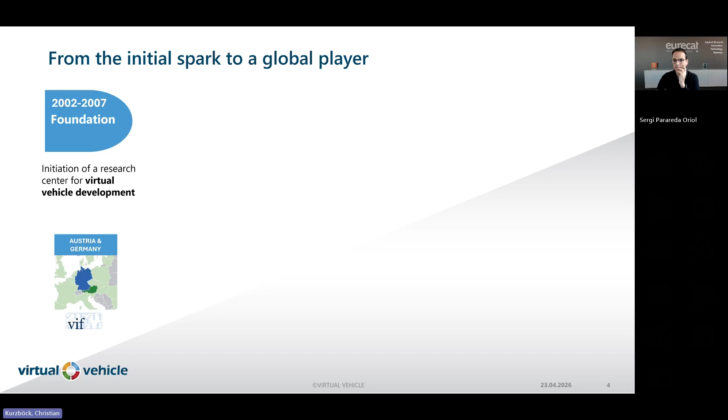We have started in 2002 with a small center in the Austrian and German region. We have grown in the European market, also on different Horizon projects, and contract research through our different K2 mobility funding possibilities.

And in the end, now actually we are, let's say, a global player on the research side, especially for virtual development, on different aspects and different fields of activities, which you can see here.

So we are working on, as I said before, mainly automotive and rail applications, but we are also working on energy, defense, some maritime, and also healthcare projects, where we are doing mainly the virtual development of different tools, methods, products, and so on.

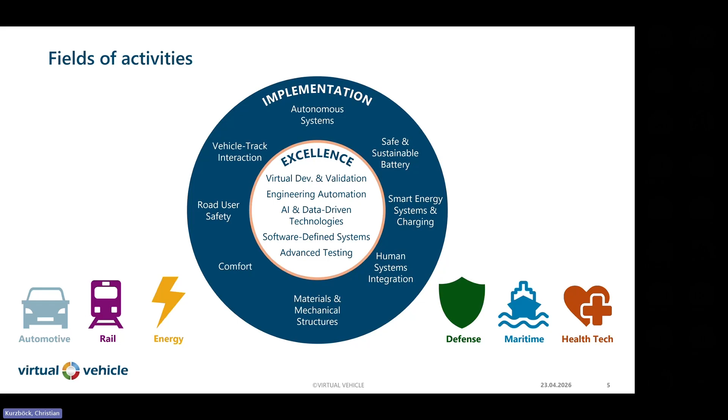And what we will have today, our main focus is the materials and mechanical structures implementation, and also the road user safety at virtual development and validation.

So what is the Virtual Vehicle Research Center funded for? We are a little bit a bridge between the scientific work at the universities and the industrial applications, where this output has to be used. We have our own funding scheme, that's the Comet K2 program.

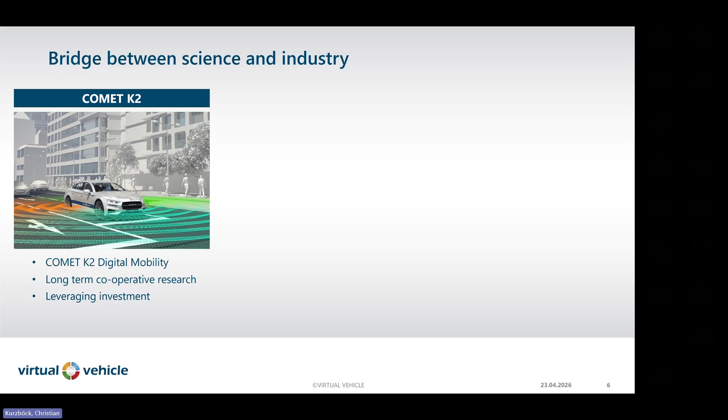We are working on different closed and also ongoing funded projects on Horizon level. And we have also some contract works with different OEMs and tier ones in our partner network, so we can provide there also different services for our partners and customers.

Our partner network, we have nearly every main OEM in the European market and the American market. We have a lot of different tier ones, scientific partners for our different research projects, and also in the rail specific and health specific sector, we have some partners where we are working on different projects.

The main point for today is a little bit material mechanical systems. That's a research field where I've been working on for 15 years, where we have different fields of activities like crash applications. We are actually working on different joining technologies and implementation in standard solvers for finite element simulations.

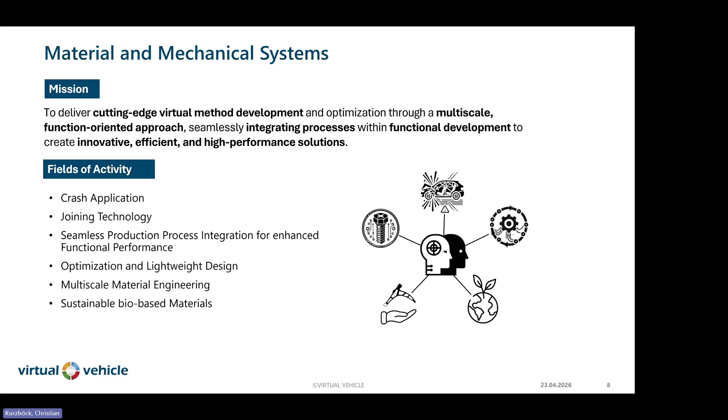Optimization and lightweight design is also a point which is main focus on the FlexCrash project. And since a few years, we are working on sustainable bio-based materials for sustainable applications in the automotive and mobility sector.

So that was a short introduction of the Virtual Vehicle and what you can expect from today's presentations. From the agenda, I will now hand over to my colleague Sergi from Eurecat, who will give you a short introduction of the FlexCrash project, and I will hand over after the presentation and give you a little bit more in-depth detail of the virtual testing of our adaptive and active solution.

Great, thank you, Christian, for the introduction. As mentioned, my name is Sergi Parareda. I'm the technical coordinator of the FlexCrash project, and also I'm a researcher at Eurecat, which is a research institute in Spain.

And I will give you just a short overview of the FlexCrash project. In this way, you will have an idea on what we are doing here. Just to have the main points, we'll see a little bit the project, the consortium, and then also the relevant points that we are working on in the project. That, of course, as you can imagine by the name of the project, we are always talking about a crash situation.

Here are some numbers about the project. It's a project of 48 months. We have a budget of about 4 million euros with 11 partners from 6 different countries. So the main point here is that we are covering all the value chain of the development of knowledge and also the application of this knowledge in real scenarios.

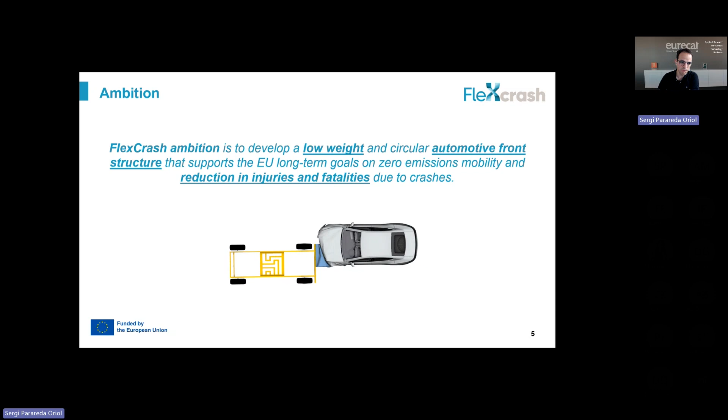But if we are reducing the weight of the vehicle, what we want is to improve or at least maintain the same safety of the occupant, the people inside the vehicle. So this is our main aim: to try to have a lighter and also a safer vehicle in the future.

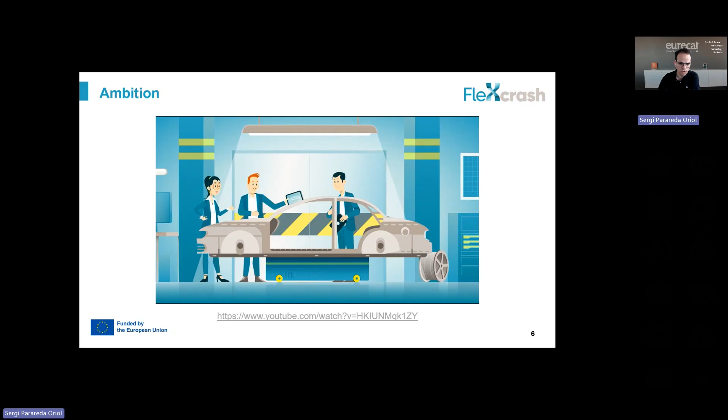So here I have just a short video, it's just one minute long, and I think it can give us good insight into the project. I hope it works properly. Let's say... maybe not, because I can't hear it. Well, if not, here you have the link. We will share this presentation with all of you afterwards, so you can click the link and see the video. Okay, so because now the audio is not working properly, we can just jump to the next one.

So then let's see the main motivation. As you can see, as we discussed, what we want is to design a lighter vehicle, but also a safer vehicle. In this case, we are focusing on the frontal part of the vehicle, since it's one of the most critical parts for safety.

And in this case, the new part, as you can see on the right-hand side, is that we are including a full aluminum design in order to reduce the weight of the vehicle, and then also to assess this full crash validation.

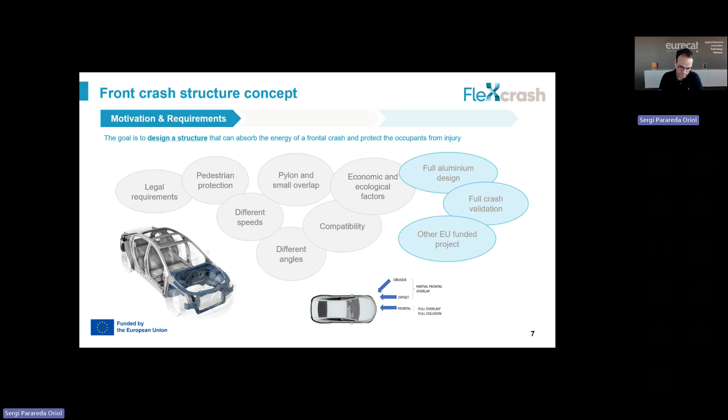That is all the information that you will see in the next presentation. But basically, what we want is just to design a proper frontal structure to absorb and dissipate all of this energy during the crash.

So to do that, what we have done, very briefly: we gathered all the information, following standards, Euro NCAP scenarios, and then gathered information about dash panel intrusion, the different decelerations that we have in the vehicle, in order to mitigate the damage to the occupants. And finally, of course, we need to know the kinematics and the chronology that we have during this impact situation.

To do that, we have used the GLab model by Gestamp, where we have a reference situation or reference structure made of steel, and then we are moving to a full aluminum frontal structure. Here you can see a little bit the path that we followed.

At the very beginning, we started with an HPDC aluminum part from a previous project, the Salema project, where they developed this component just to prove the technology. And we tried to implement it into our GLab model.

But since we have new partners in the consortium, we have the manufacturer Idria. We developed a totally new HPDC part and also new extruded profiles with new alloys in order to have better performance of these components. And on the right-hand side, you can see something in the middle of this HPDC part - we will see later, but it's more related to the active safety of the vehicle.

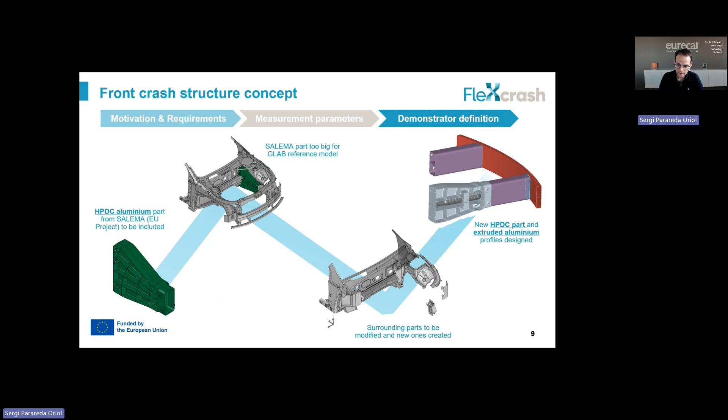And then here, all the processes that we followed. We started, of course, by knowing the situations we have, the different load scenarios in our vehicle, but also, in order to develop proper materials and proper solutions, we developed new testing procedures about fracture toughness mostly, in order to see which is the best aluminum alloy for these profiles.

These are the main components for dissipating energy. Then, of course, the HPDC optimization - although it's not a component or material really suitable for these situations, we wanted to prove that we can design it for crash situations. And here you can also see the AVFFs, so basically we are using hybrid manufacturing.

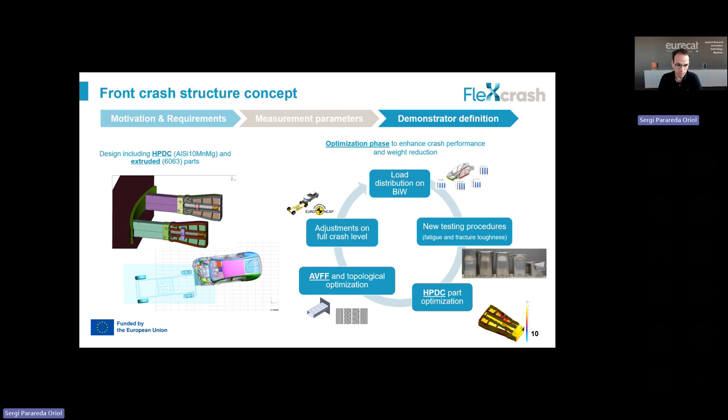This is another relevant point of our project: we want to use additive manufacturing to reinforce locally the extruded profiles or the different components that we are having in our vehicle, in order to have a proper crash performance while we are reducing the weight of the vehicle.

So basically, what we are doing in the extruded profiles is using this additive manufacturing, the LMD process, to have the deposition or these ribs on top of these extruded profiles in order to reinforce locally some parts, and then we can just use the unreinforced ones as crash triggers. By using these strategies, we can achieve a weight reduction of at least 12% in these components, while maintaining the same energy dissipation.

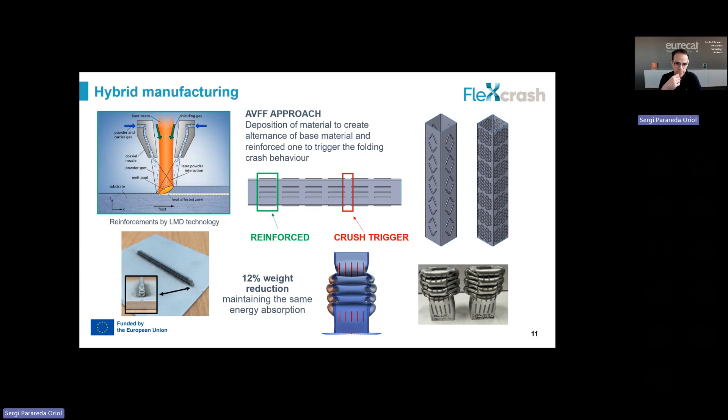Here you can see that we developed quite a lot of different patterns: fishbone, honeycomb patterns, and also a lot of different combinations with longer gaps, shorter gaps, more ribs, less ribs, etc. As you saw in the previous slide, we followed an optimization process, producing quite a lot of different ribs and structures in order to set up the process and see that everything is working properly.

This is when we are talking about AVFF in the project, which you will probably hear a little bit about. We are talking about this adding value to function of features. So at the end, these ribs that we are introducing in our components by using the laser metal deposition.

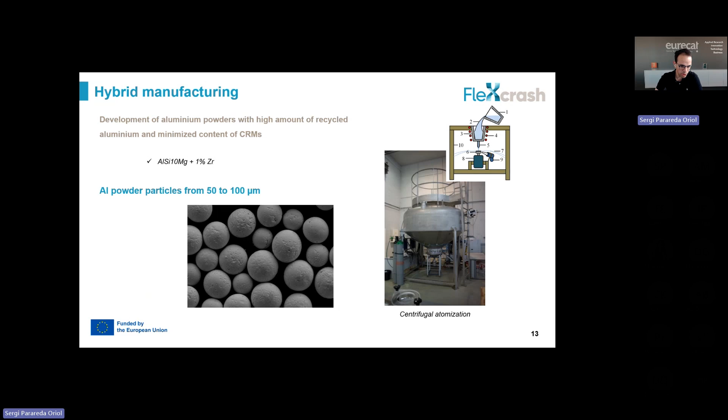To do that, we also developed new aluminum alloys, using zirconium for instance, new powders for this additive manufacturing process, in order to improve the performance of these ribs. This is also a relevant point in our project.

And here, finally, we have the demonstration of the results. So we are manufacturing the demonstrators of our project. The idea is to see what happens when we also have non-standard crash situations, when we are changing the speeds, the angles. You will hear more in the next presentations.

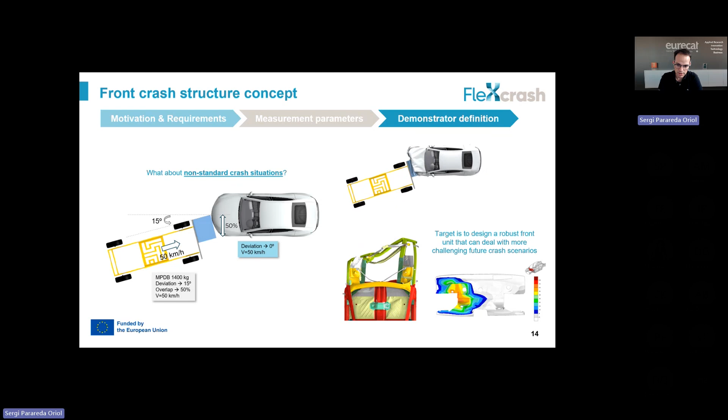So just to conclude, some takeaways that I wanted you to have in mind for the project. Basically, what we are doing is developing new structures for crash situations, in order to reduce the weight of the vehicle, but maintaining the same crash performance. Then, by using aluminum alloys and also similar aluminum alloys, we want to improve the recyclability of the vehicle, and of course this also has an impact on the environment.

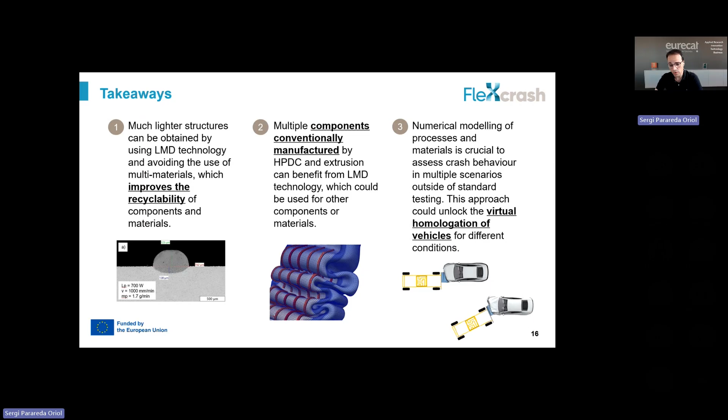And finally, the relevant part about simulation, and how we can predict the different crash situations, how we can adapt our structure in order to design the vehicle, but also how we can use these simulations for the virtual homologation of our vehicles that we will design in the future.

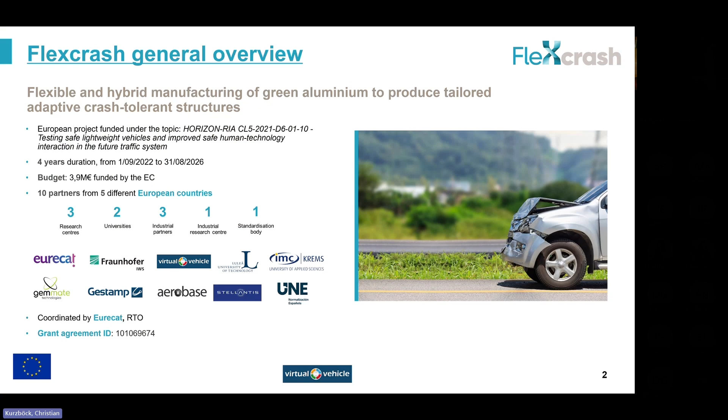First slide, FlexCrash general overview. I will skip the FlexCrash project introduction. So what's the research beyond the state of the art? As Sergi mentioned before, the main goal is to lightweight the vehicle as much as possible, because less weight means less fuel or energy consumption during operation, giving us a very efficient mobility solution.

On the other side, we want to increase passenger safety. The main problem is these two targets do not fit together - when you lightweight the vehicle, passenger safety typically decreases. So how can we tackle that problem? That is the main research question of the FlexCrash project.

How can we make the vehicle more lightweight on one hand, and on the other hand increase passenger safety, by adapting classic solutions with adaptable manufacturing technologies and an active system that helps the passive structure increase passenger safety across different crash loading scenarios for future mixed traffic possibilities.

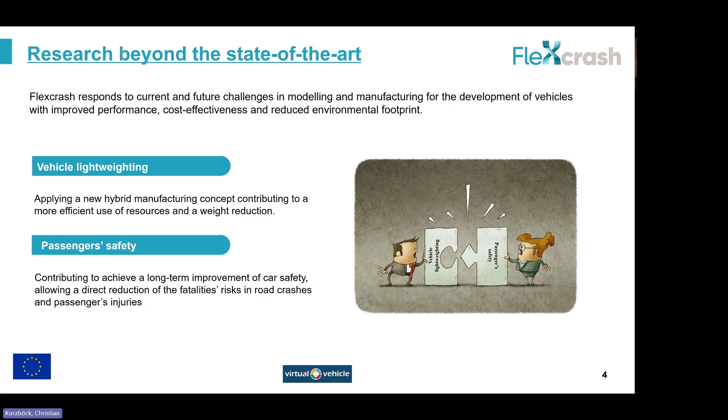There are 5 different pillars where our solution is working. As Virtual Vehicle, with partners from the Technical University of Luleå, Aerobase and also Gestamp, we are working on crash simulation, from advanced material simulation up to virtual testing in the full vehicle.

That's one pillar. The second pillar is the manufacturing side, which has to be flexible and hybrid, combining different manufacturing technologies to assure our solution is manufacturable and also provides the developed safety for the passenger.

The third pillar is the structure itself. We have to optimize our patterns, our structures, and active system for the different loading scenarios that we worked on at the beginning of the project.

Then advanced testing, from the material itself up to component level and sub-component or sub full-vehicle level, will be carried out at the end of the project in the next half to one year, just to validate our virtual work and testing that we are actually working on.

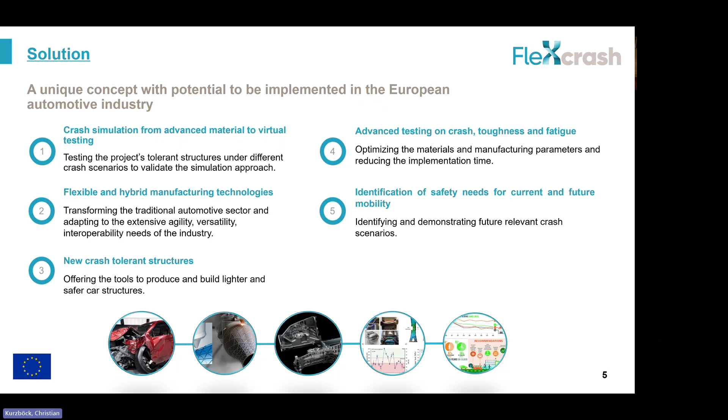So what are the future relevant crash scenarios we found and set up our work on? We have this crash reconstruction pipeline from IMC Krems, one of our project partners, where we can simulate different scenarios, generate different ADAS opportunities, simulate driver behavior, and from this driving agent behavior jump to our passive safety simulation and development.

We have the opportunity to change different scenarios. We can use this pipeline for scenario creation for future mixed traffic, and we can use this data for our optimization on different angles, velocities, and so on.

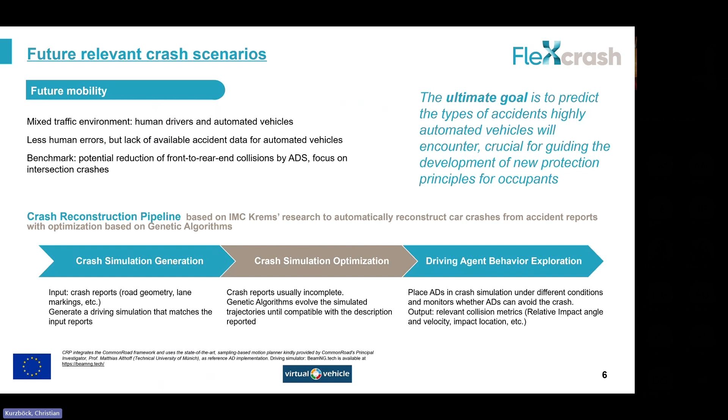From our research and our scenario generator, we found 3 different crash scenarios which will be the main scenarios within future mixed traffic. From these 3 scenarios, we have these configurations for testing our system.

So we have these 3 different front crash scenarios, and we chose for the main validation and virtual testing the bottom right one, because that's the most severe one for passenger safety.

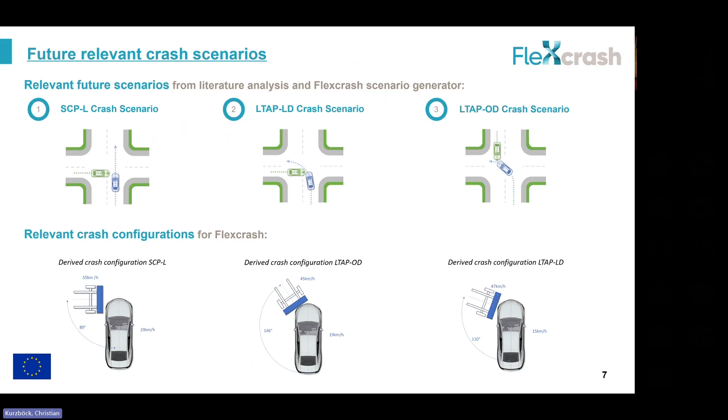From these crash scenarios, as Sergio mentioned before, we are able to use the Gestamp GLab virtual model as a demonstrator, where we started with the standard steel front end. We modified this front end system with a full aluminium crash structure, as you can see in the top right picture, and I have an older version from the Salema or HPDC part.

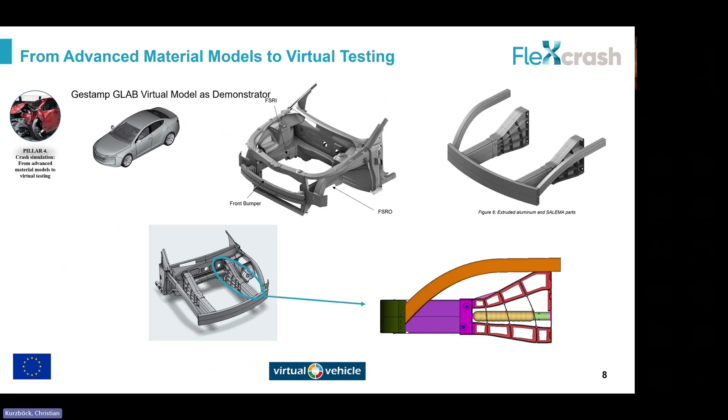That's a combination of an aluminium extruded part in the front rail, which will be modified with different additive manufacturing and welding patterns. In the rear end, the HPDC part is highly modified in the last version by Hydria and our optimization, and there we've integrated the active solution mentioned before for adaptability of the full front end crash behavior.

What was necessary for that? As Sergio also mentioned before, it was material development, so that we can use these different recycled aluminium alloys for these welding processes, to adapt a quite simple base structure.

The goal was to have an extruded, simple designed front rail, which will be strengthened with different patterns and modified for different loading scenarios, weight of the vehicle, and so on, so that we can adapt these simple extruded profiles with whatever pattern or structure we need to adapt the crash performance of the front rail system.

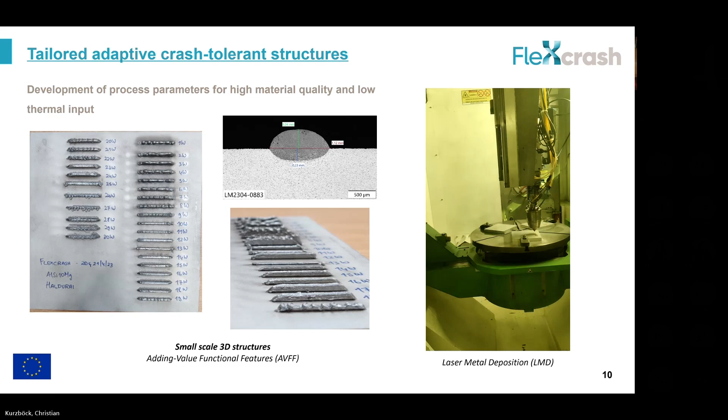So in the end, when we go to virtual development and virtual testing, we have in the upper left animation the standard front rail without any patterns on it, and in the bottom left animation the simplified patterns on the structure. What you can see here is the energy consumption between these different solutions.

We are gaining about 30% energy consumption with the same baseline extruded profile, just by implementing these different welding patterns to adapt the crash performance of the front rail. So that's one of the technical solutions for the adaptability of quite simply produced parts, with different pattern optimization directly on the extruded profile.

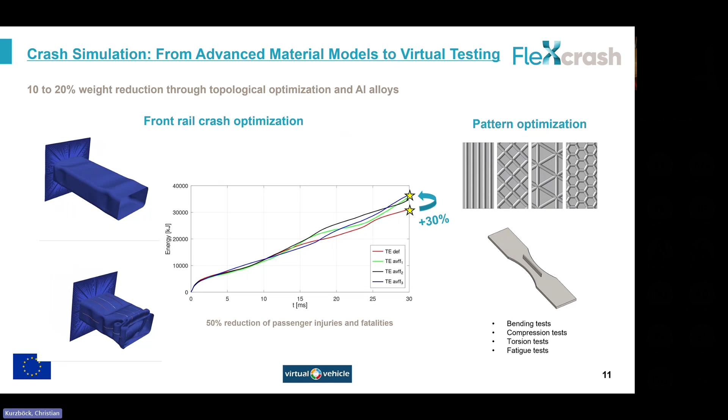Just to give you an impression of how this could work: we compress the front rail, and when it is fully compressed, the active system starts to work and modify the front end crash behavior dependent on different loading scenarios, and also on different crash partners, velocity and weight—for example, information that can come from vehicle-to-vehicle communication. We can adapt the active system directly and increase the compatibility between different crash partners.

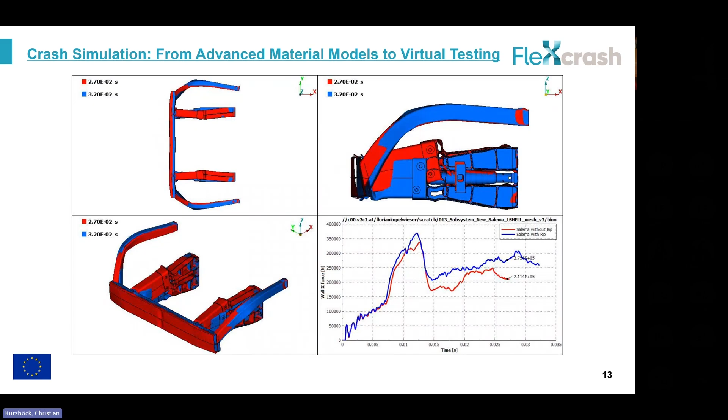So virtual testing and virtual prediction of the behavior of different structures will get more and more important. For that, you need really well validated material cards and methods to predict behavior, to enhance, in the end, vehicle safety, because of the two different targets that we have.

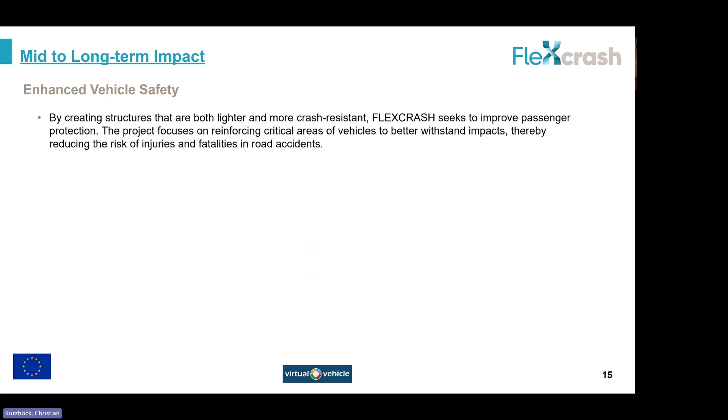On one hand, lighter vehicles, and on the other hand, higher passenger safety. The pipeline from FlexCrash is a combination of a passive structure and an active system that we are implementing in the front end crash structure, to in the end have an optimal deceleration pulse for the passengers in different vehicles.

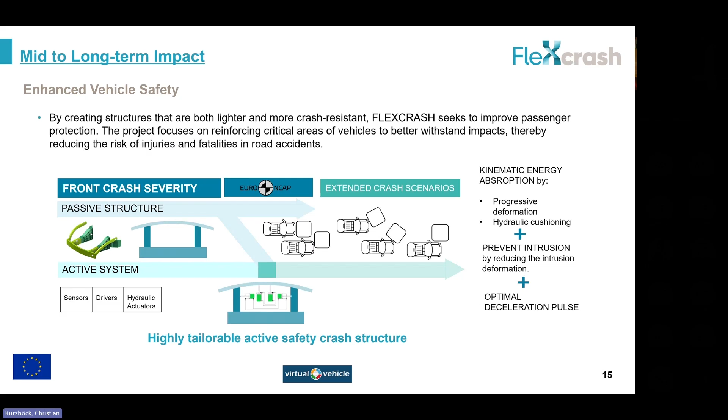Not directly virtual development, but manufacturing technologies also have to be mentioned here, because that's the crucial point—these manufacturing technologies go hand in hand with virtual development, since we need to know if the different technologies are working and fit together. That's also a main point of the FlexCrash project: to ensure these technologies are working, especially for crash applications.

And in the end, when it comes to recycled aluminium, environmental sustainability is also a big point for EU goals of reducing greenhouse gas emissions up to 2030.

So that was a quick overview of the virtual testing, virtual validation part of the FlexCrash project. If there are any questions, please, we have a Q&A session at the end of the webinar. And thank you very much for your time.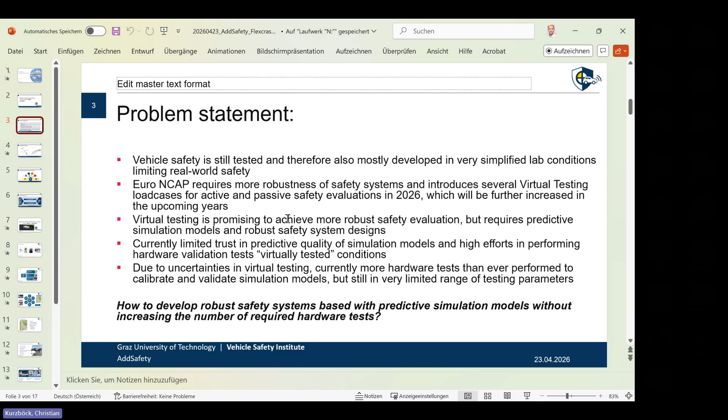But for this situation, we need really predictive simulation methods and robust safety system design. That's at the moment a little bit limited, because the trust in different simulation types and how you can qualify simulation models for Euro NCAP testing requires a lot of validation tests too. So the big question is how to develop robust safety systems based on predictive simulation methods without increasing the number of required hardware tests in a useful way.

So the current situation: we have limited real-world safety addressed in some test cases. At the moment, a lot of industry partners are trying to increase virtual testing in their houses, but they also have to increase hardware tests to do the validation part, and that increases the costs a lot, which is not very useful.

So the AddSafety ambition: it's a national funded project with about 6 million euros over a time period of 4 years. We are at the moment in the first project phase, and I will show you the partnership at the end. But what's the main part? It's to improve this kind of hybrid testing—to conduct the necessary hardware tests and component tests in parallel to see how we can make the simulations more beneficial, with better boundary conditions. That's one main task: to reduce development costs and also make it possible to have use cases in simulation which are too difficult or too dangerous for hardware testing.

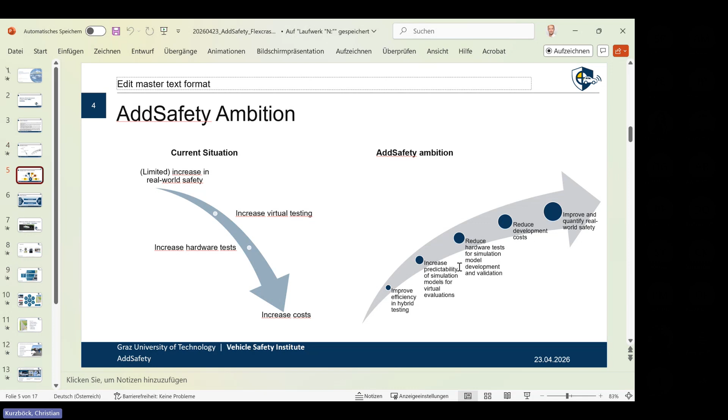The idea behind it is, of course, more robust vehicle safety systems, with benefits and test cases not only from the law or Euro NCAP, for example, but also from real-world benefits. So we need more robust evaluation scenarios, which will be defined in the project. We also need a way to qualify passive and active safety simulation models which are allowed.

For example, for the Euro NCAP HBM test cases, you have to qualify your simulation HBM. There are validation cases you have to simulate before, and once you have the qualification from Euro NCAP, you are allowed to use it in simulation. Therefore, we need new methods for selecting these test cases and simulations.

Therefore, the project is one big project with four work packages. We have methods for active safety simulation, model calibration, validation - that's the active part, where we are mainly involved.

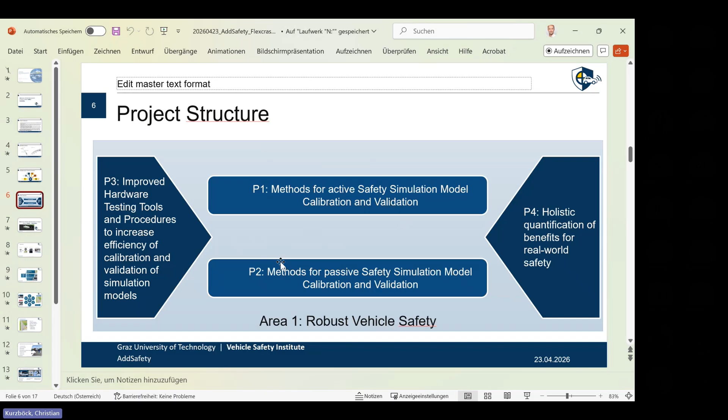What's our part in this project? We are more on the active side. Our motivation is, of course, we have all these topics about road user safety. We have the boundary conditions and requirements like Euro NCAP, NHTSA, also C-NCAP.

We have in our company an autonomous vehicle - our Ford Fusion. It was the first vehicle which was allowed on test tracks, and also some streets to drive autonomous, with a test driver.

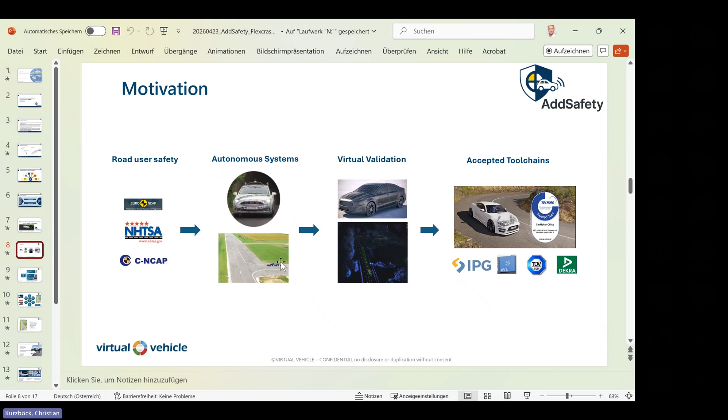And we are going to do the virtual validation and develop a digital twin for acceptance, for example with declarative methods, so that we have in the end a process which will allow the customer, or in this case the project's partner, to have a whole virtual test setup, for example in this case for Euro NCAP.

So what's the main part for this digital twin? At the moment, we are at the status that we already have our test vehicle and a simulation tool in the CarMaker, IPG CarMaker software. Now we are in the process of doing the validation and verification.

We are also a partner of Euro NCAP. Austria has been a partner in Euro NCAP since 2022. Virtual Vehicle is here partnered with Safety Labs Austria, and we are addressing the virtual active part. We are working in the working group for setting up all these methods and roadmaps for Euro NCAP together with the other Euro NCAP partners.

At the moment, we have our proving ground in Austria, where we already have a full digital map of this testing area. We are working together with our partners to verify and do the process for the validation of the targets for the tests.

And of course we have our vehicle test - this is our Ford Fusion, which is from the software side completely open for our company. So we have the possibility to read out the test data and also have the information on the measurement system, sensors, cameras, and all that we are at the moment going to implement in the software.

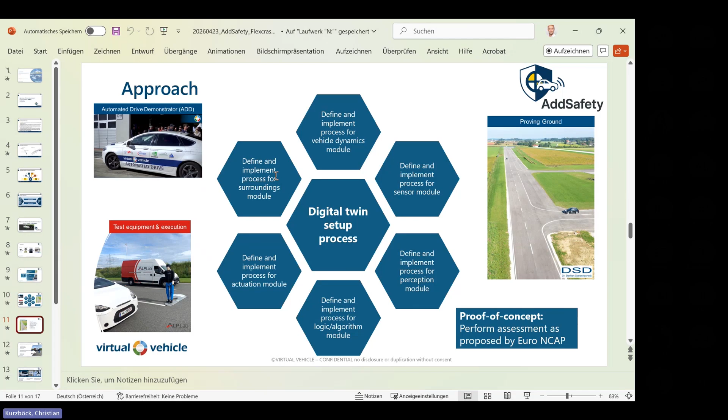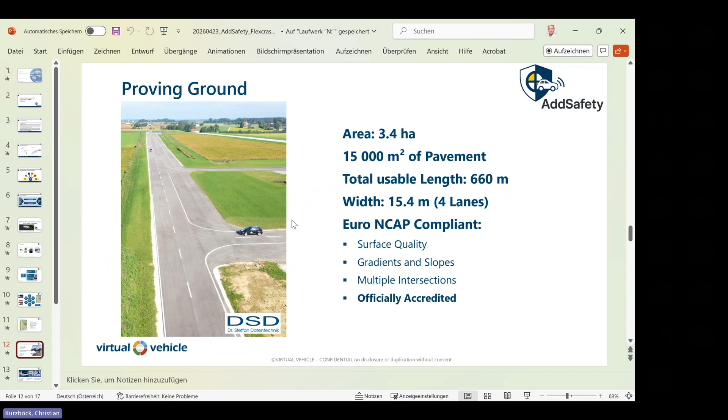So just some info about the proving ground. It's a Euro NCAP accepted proving ground, 2 hours away from Graz, where we work together. We also have here the whole information of surface and slopes, gradients - everything is available and also needed for the support systems and for testing the Euro NCAP requirements.

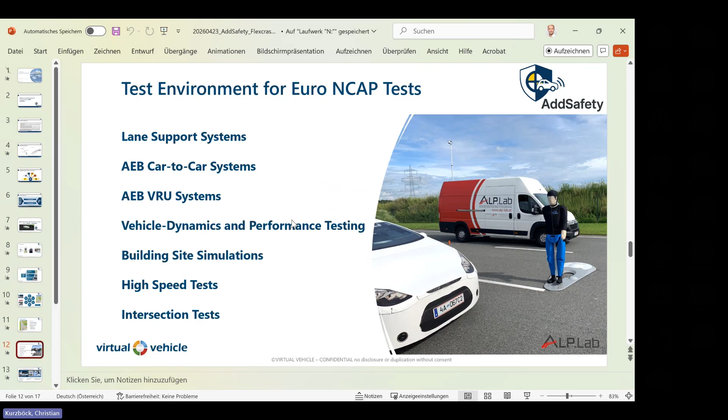We have partners like ALP.Lab, which support us with hardware equipment, and we are currently working on the validation for the software at the moment. And of course our vehicle, as mentioned, is a Ford Fusion, which is equipped with different sensor types, cameras, everything necessary.

We have had this demonstrator vehicle for 8-9 years, and have tried a lot of different measurement equipment and systems. All this know-how and these methods we've been learning over the last years are now implemented in this process. It's a lot of work to do, but we are on a good way for that topic.

If you are interested here for other projects, our vehicle is completely open for projects with different possibilities. Depending on the case, in this project we are using together IPG CarMaker.

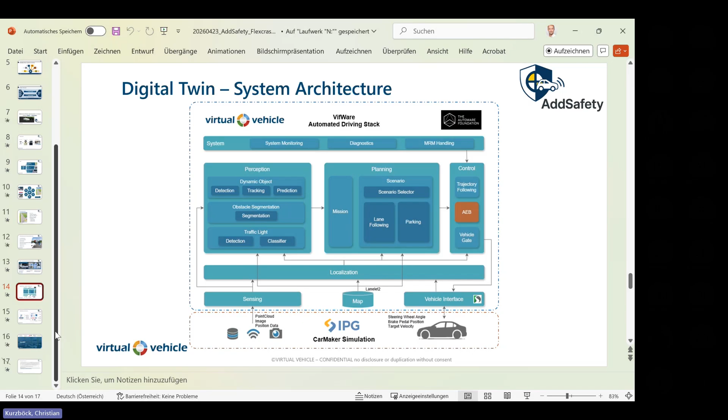So you are able to test different scenarios, measurement equipment, sensors, and it should be in the end a method which could be used for Euro NCAP and also for other industry partners. That's my last slide for this project, if you are interested.

As mentioned, the coordinator is Graz University of Technology. We at Virtual Vehicle are the scientific partners for the active part, and of course the testing partners. AlpLab is responsible for active safety testing. DSD is the company which owns the test track. Then we have also TECCON, who are accredited for Euro NCAP passive testing; they are also located in Graz.

From the industry partners, we are cooperating with 4a, Humanetics on the test equipment and software side, Andata, CarMaker, and AVL, to make this happen for both active and passive testing. Then we have component suppliers in the project for sensor systems and sensor types, and we also have involved two German OEMs to have the method implemented, as well as test vehicles and so on.

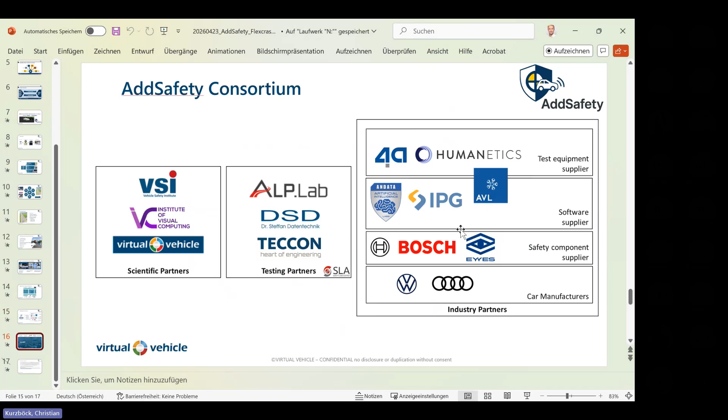Thank you for listening to this project overview, and sorry for the interruption, beginning with the software problem on the laptop. Yeah, thank you.

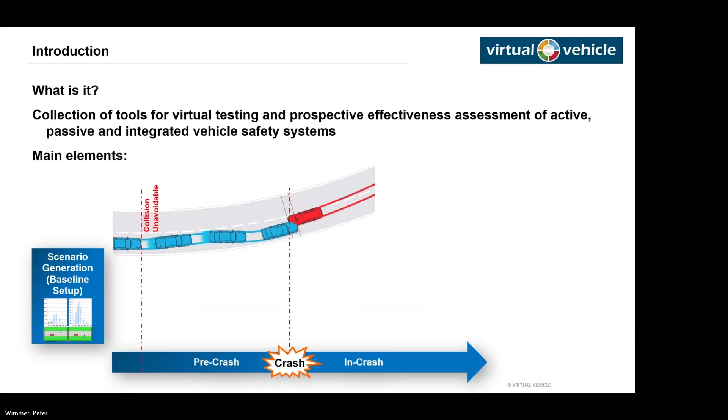The main elements are as follows. We start with scenario generation, so we need to define a baseline which represents the situation that we have before we introduce, even virtually, a certain safety system. Then we directly start with our simulations, which are divided into several parts.

The first one deals with the pre-crash phase, so there we have a scenario-based approach which consists of all relevant components like the vehicle, the driver, the safety system consisting of sensors, algorithm, actuators, and also the vehicle surroundings. If this simulation ends up in a crash - and this, for now, is just an example, the VRU setup - we have one or two stage in-crash simulation, which consists of various tools that allow us to determine the injury relevant for the final step.

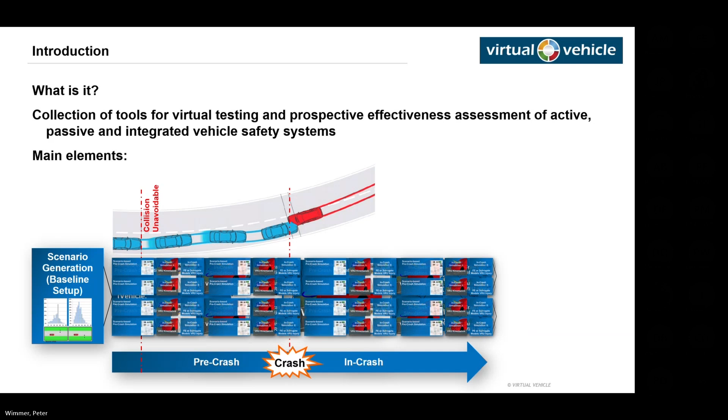Of course, we have to do this not only once, but as we want to determine effectiveness, we have to do this many, many times. This is also a challenge that I will address later on. And the final step is then effectiveness assessment - determining which kind of safety, or how large the safety benefit is, that we can obtain with a certain safety system or safety system configuration.

Regarding the baseline scenario generation, let me start with this very general slide. This image is taken from an ISO technical specification that I was also involved in developing. There we define several types of baseline approaches. Basically, we have three main approaches.

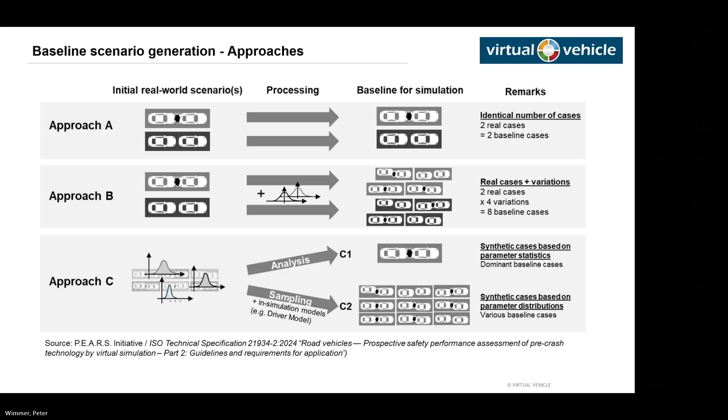The first one is just replicating real-world cases. This is what we call approach A. Approach B would then be extending these real-world cases with some distributions and modifying them, thus increasing the number of baseline cases. Approach C is a little bit different. It is not directly replicating or based on individual real-world cases, but it's based on distributions of relevant parameters taken from the real world, then generating synthetic cases based on these distributions.

I would like to show you one approach that can be attributed to this synthetic case generation. This is something that we have developed, what we call the scenario generator. It is based on crash data, as mentioned before. It is capable of generating an arbitrary number of cases which are statistically representative, also including rare combinations, and it is built to produce scenarios for car-to-car and car-to-VRU test cases.

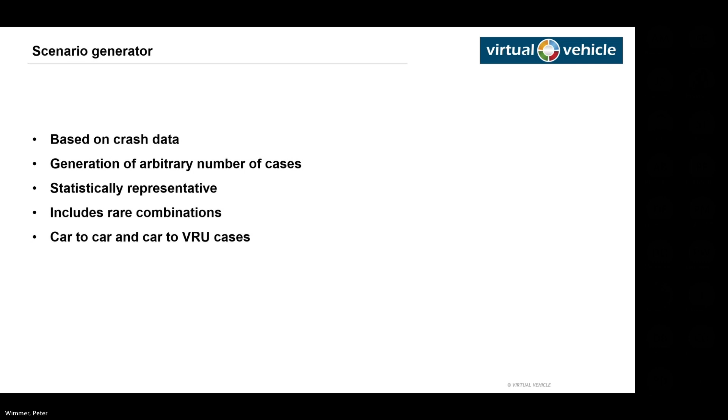This is a short overview. It has a GUI, obviously, where you can make some selections. What you will get as an output is information for a test case on the initial positions and speed profiles, basically the trajectories of the involved participants in the simulation, but also environment conditions like dry or wet, or lighting conditions like day or night, which might be relevant for sensors and also for human drivers. For the VRU cases, also some properties of the vulnerable road users, like sex, age, height, weight, with statistical data behind them.

Coming to the next main element, this is the continuous virtual simulation, and first of all the pre-crash part. Also here I would like to reference the ISO technical specification. There is depicted a generic simulation framework for prospective safety performance assessment of pre-crash technology, and we stick quite closely to that.

Maybe I'll go briefly through it. We have four main elements, I would say. We have simulation control, which is more or less the conductor of the simulation. Then we have the vehicle surrounding, which is everything that is relevant around our vehicle under test - this is traffic, everything that moves. Infrastructure is everything that is static, like roads and buildings. Environment is things that might change over time but do not move, like lighting conditions, weather, and so on.

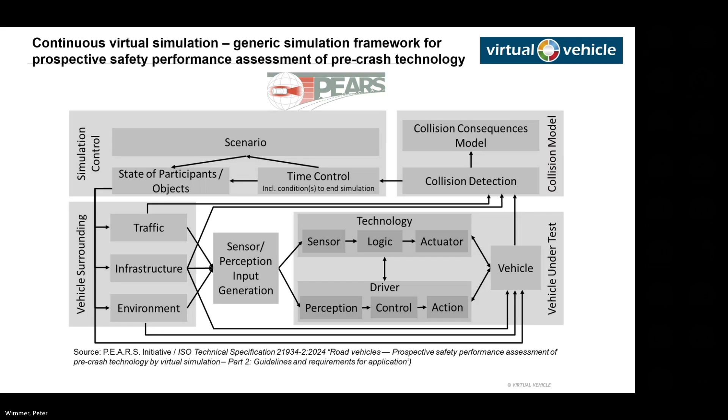And the final block is then the collision model, which of course consists of collision detection, so that we know if a collision occurs. And if a collision occurs, we have the collision consequences model, which seems rather small here, but this can also be a lot and very complex.

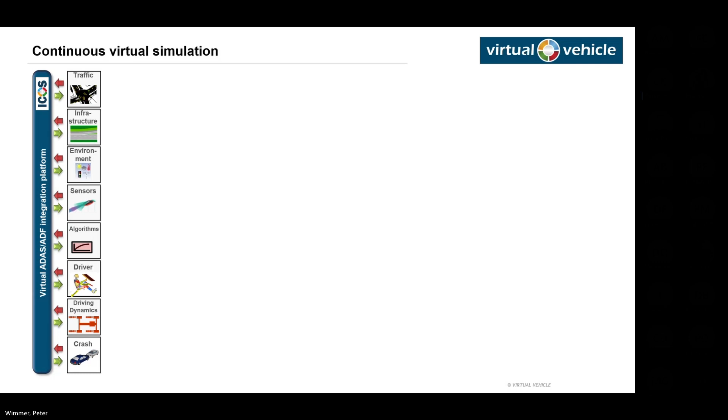Okay, let's see how we did this. You might recognize several components that you have seen in the previous slide. What we do here at Virtual Vehicle and in the safety toolchain is take all these components and connect them via our virtual ADAS/ADF integration platform, which is a co-simulation based approach. This approach allows us to connect all the elements and ensure that they communicate with each other with appropriate timing, and also that the scheduling is such that the models run when they are required.

We can stop and start them, because in the crash phase we don't need to start them in the pre-crash phase, and the other way around. This is one example of an exemplary setup for a VRU use case. You can see that we can couple a lot of different simulation tools together to build an overall simulation that covers all the relevant aspects.

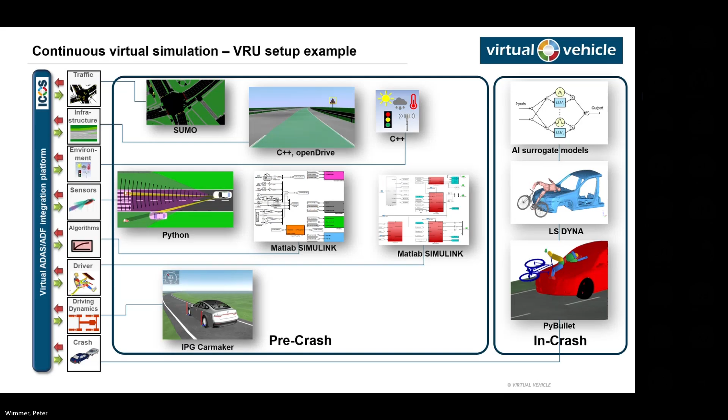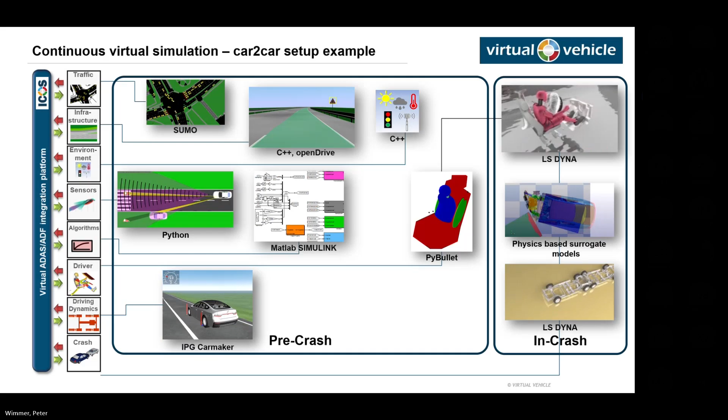Here the same, and this is more relevant also to the example that I'm going to show later. This is a setup for a car-to-car simulation or safety impact assessment. So also here you can see we have a lot of different types of simulations that we can connect.

And the final element of the theoretical part and of the safety toolchain is then the injury risk-based effectiveness assessment. The simulation output are injury criteria values, I think this is quite obvious. What we then do next is transform the injury criteria using injury risk curves to an injury risk. And as we have a lot of simulation runs, we also have a lot of results, so this means we have to do some statistics to get finally results for each body region and the total result.

Okay, sorry, I was just, yeah.

So we get a result for each body region and the total result in terms of numbers, but also graphical output. And the final step is the actual effectiveness assessment, which means we compare the outcome of the treatment simulations, so the simulations with a safety system on board, compared to the situation before, the baseline.

And then we get something like this. This is an exemplary result.

I guess everybody can hear me? Yeah, I hope so.

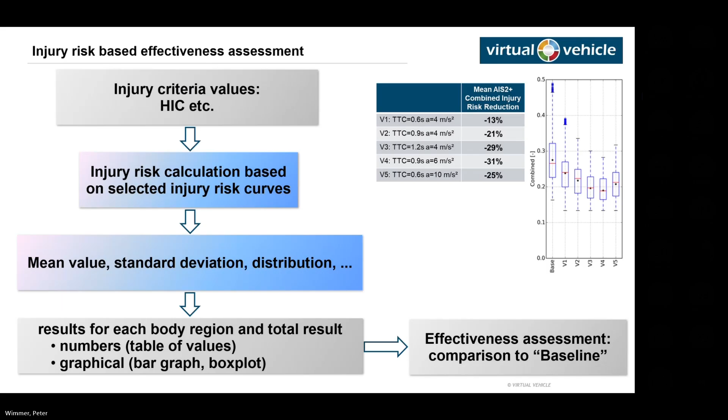So we get numbers for various variations of a certain safety system or types of safety systems, but also, as here, as an example, a box whisker plot. And this serves as a basis to decide which safety system should be implemented.

So summing up the theoretical part, what are the benefits of this virtual vehicle safety toolchain regarding the simulation? It's automatic, a continuous simulation for an arbitrary number of cases without any interaction. So this runs fully automatic.

It is sensitive to a specific vehicle geometry and safety system configuration, and it can be easily adapted in terms of modeling detail or other models, because it's a modular approach through this co-simulation. So we can very easily exchange a model because the interface is the same. We can connect various types of models to quickly change the modeling detail of a certain element.

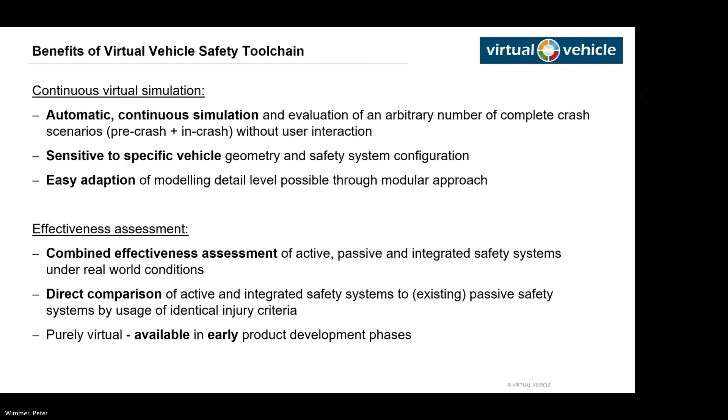Regarding the effectiveness assessment, we do a combined effectiveness assessment of active, passive, and integrated safety systems. The approach allows for a direct comparison of the different types of safety systems, and it is purely virtual, so we can use this in very early product development phases.

Good. I will show you an example of an application of this. This has been done in cooperation with ZF. It is an example of a frontal collision scenario with AEB and an advanced occupant protection system.

We had this research question that we wanted to address: what is the safety performance of a combination of an adaptable standard restraint system with a 50% male driver, so this is our passive safety system, and an AEB system, an active system, in a variation of vehicle-to-vehicle frontal crash configurations, under consideration of human movements within the pre-crash phase.

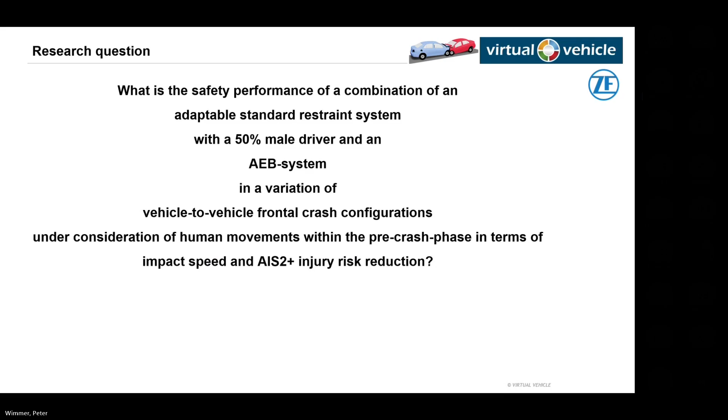We also considered that, because the AEB decelerates and thus the occupants move in a way, we wanted to see which impact this has on the performance of the passive safety system. And the criteria that we used were impact speed and mainly AIS2+ injury risk reduction.

Briefly, the safety systems under test. The AEB system was configured as follows: it is TTC based, and we had two variants. Once it fired at TTC 0.6 seconds, and the other variation was 0.9 second firing time. And the action when firing was just hitting the brakes as hard as possible.

For the restraint system, we had 4 parameters that were varied: the airbag time to fire, the airbag vent hole diameter, belt retractor time to fire, and also the belt retractor load limiter level.

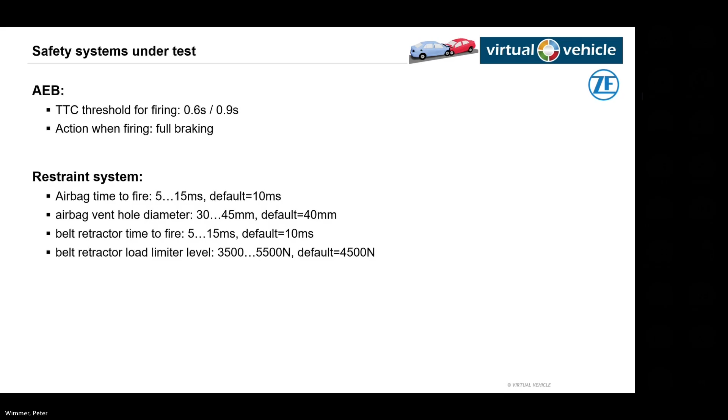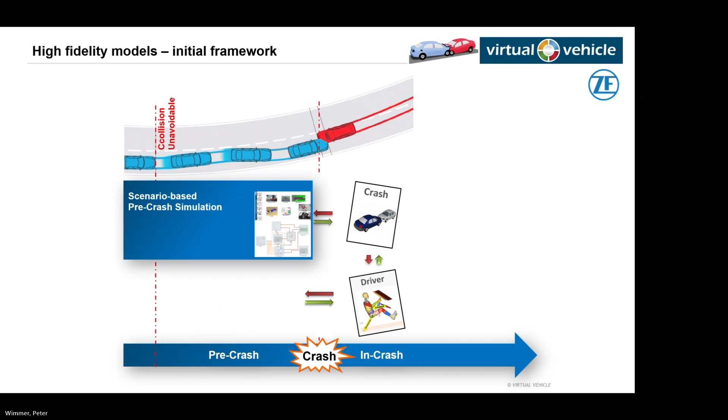This is hopefully familiar already to you, so we have these various components. We first built an initial framework with high fidelity models. This looks as follows: we have, again, a scenario-based pre-crash simulation with vehicle, driver, active safety system and surrounding. We have then a detailed vehicle in-crash simulation based on finite element models to determine the crash pulse. And in parallel to that, a continuous vehicle interior and occupant simulation for the pre- and in-crash phase.

As I mentioned before, we wanted to also capture the pre-crash motion, so this model is fed with the accelerations from the pre-crash phase, but also from the in-crash phase. And this model also delivers the output that we need for the determination of the injury severity.

However, these two models, the vehicle in-crash simulation and also the interior and occupant simulation, are rather slow, which is not ideal if you want to calculate many cases. So we had to do something about this.

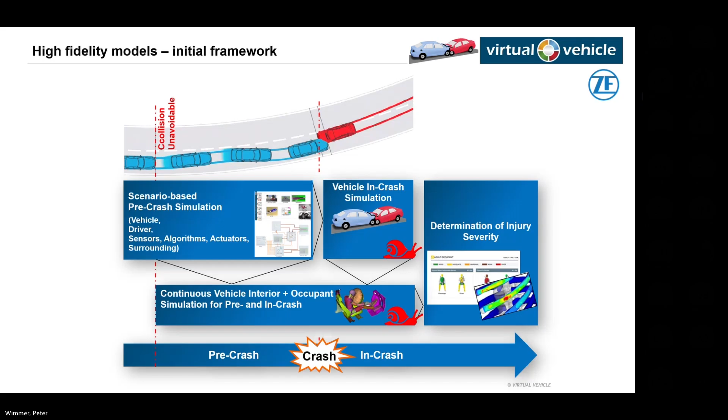So this combines crash estimation and also the motion and the passive safety system of the occupant in the in-crash phase. And these both are much faster and allow us to do these large scale calculations that we need for safety performance.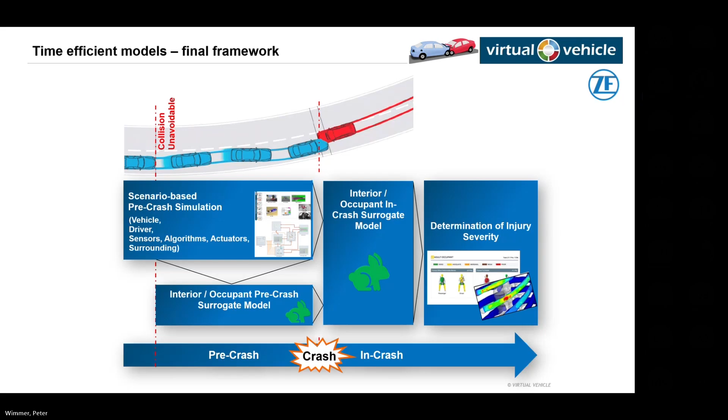Let me show you some results. We did baseline runs, which ended up with a mean impact speed of roughly 60 kilometers per hour. We have an average AIS2 plus risk of 0.7, so 70%. This risk is based on HIC and also chest deflection.

This video shows an overview of the simulations. The blue dots are the opponent vehicles, which all, sooner or later, end up in a frontal collision with our vehicle, which is at the center point of this plot.

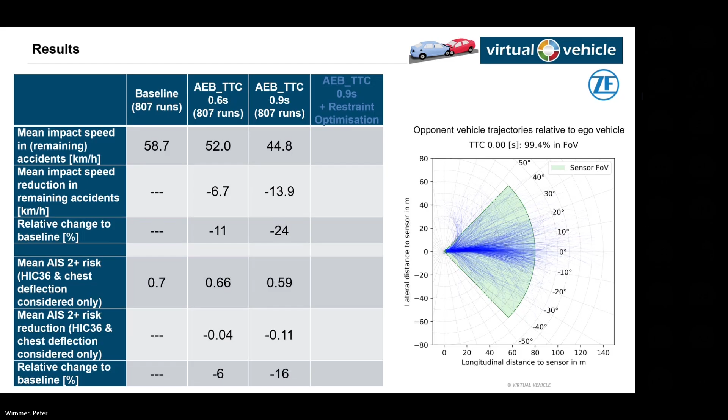Additionally, we did these variations of the AEB system, so we get a reduction, hopefully, regarding impact speed, but also regarding injury risk. This time is rather late for firing, so we also had one with earlier firing, and there we can see that the numbers reduce, so the impact speed goes down and also the injury risk.

Regarding the passive safety systems, as our surrogate models are that fast, we did something that is, I think, really interesting. We did a restraint optimization. For each of the cases, we optimized the restraint system parameters to get the minimal injury risk individually. Of course, here it doesn't change anything because it's still the same AEB system, but here you can see that we even further can reduce the injury severity.

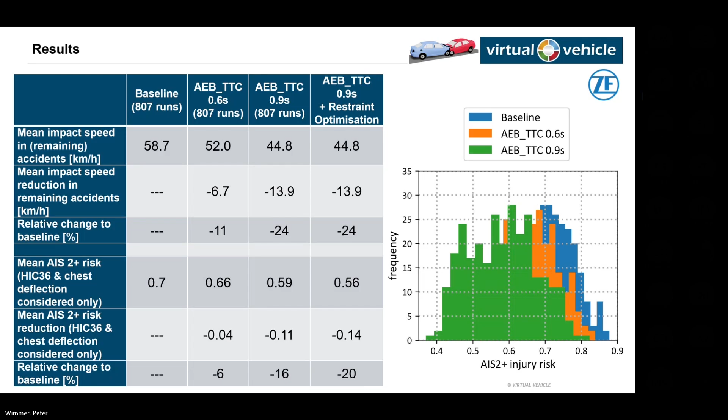I'll come to the final slides and conclusions regarding the framework used specifically in this application. It covers the whole course of events from normal driving up to crash. It can consider the influence of active and passive safety systems on injury risk, and it is capable of being used in a scenario-based assessment to cover a large range of scenarios and application areas for the safety systems.

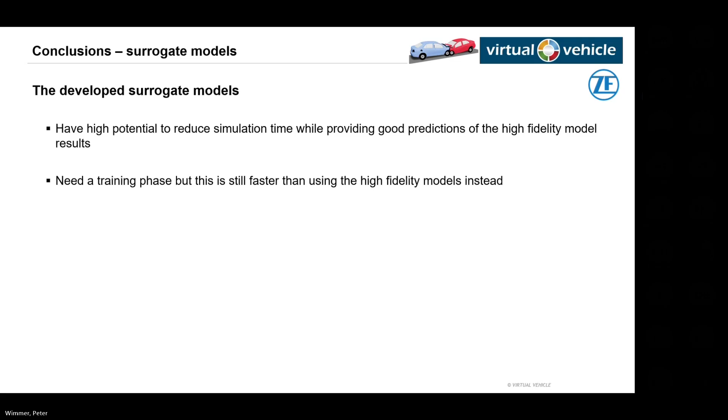Regarding the surrogate models, they have a high potential to reduce simulation time while still being good at predicting the high fidelity model results. However, they need a training phase, but even including this, the overall process is faster than using the high fidelity models for all the scenarios.

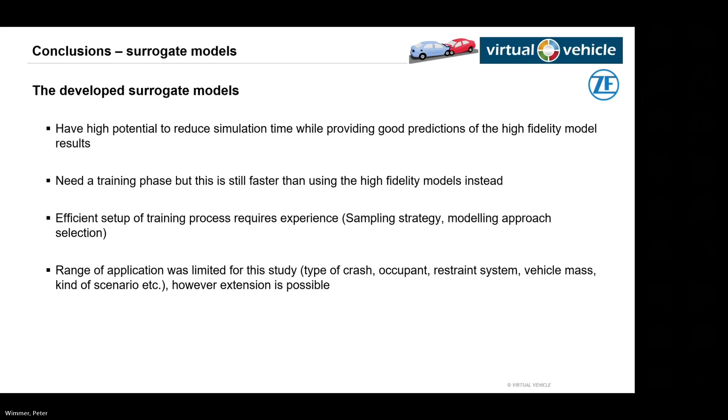But of course, you have to put your brain power into how to set up the training process, and also regarding sampling strategy, which kind of modeling approach, and so on. In this study, we limited the range of application, but extension is, of course, possible to get further in this field. And that's all from my side.

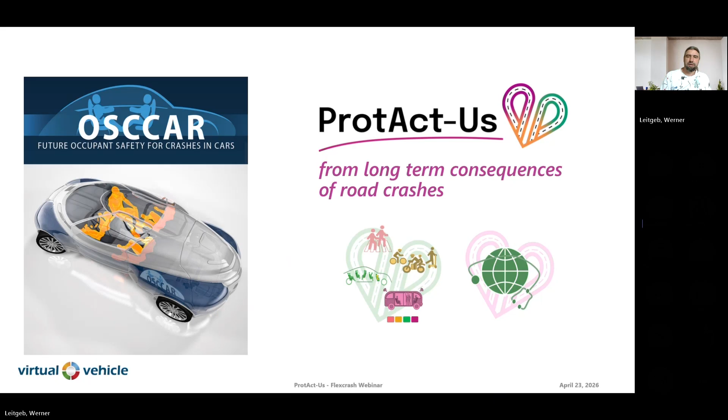I will divide my presentation in two projects that I'm both happy and was happy to coordinate both of them. OSCCAR project from a couple of years back, kind of building some of the bases that are currently used in FlexCrash, and then we'll focus more on the current running project ProtAct-Us that deals with long-term consequences.

So back to OSCCAR. This is a project from Horizon 2020 program, so rather old, but still relevant. A lot of stuff evolved there. Premises back then were that future accident scenarios involving passenger cars need to be understood a lot better, especially in context of highly automated vehicles. Some people always think that vehicle automatization will remove accidents, will remove crashes, but I think we are all aware that this is maybe a very, very far distant future.

Accidents will occur and will be a problem for the foreseeing future, especially in mixed traffic scenarios. In OSCCAR, we came to the point that especially critical crossing scenarios are difficult to control for highly automated vehicles, and coupling that with sitting positions that do not require the driver to sit straight behind the steering wheel might be a challenge for protection. So that was the basis and premises of the OSCCAR project.

In this context, we developed and further improved assessment methods, virtual assessment methods, and currently most of this assessment is done with crash test dummies. You all know them. This is the ones that we need for homologation, and this is the basis, for example, consumer testing like Euro NCAP or US NCAP or China NCAP. But OSCCAR back then foresaw, or many people in OSCCAR foresaw, that human body models will supplement these crash test dummies.

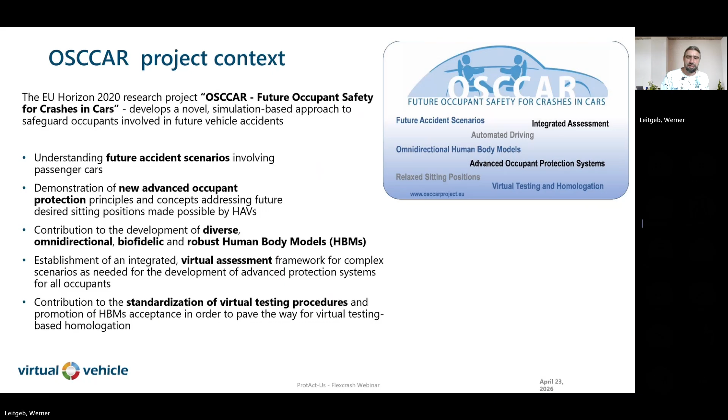standardization of models, looking a little bit into the more diverse population. And yeah, this is what we did then. A follow-up on that is the currently running ProtAct-Us project, where we look in a lot more detail in the injuries. What we want to do is protect road users, all road user groups, from serious injury and long-term physical, cognitive, and mental health consequences.

This is the critical part there, and we are doing that by interlinking research action between the traditional engineering methods that most of you in this webinar, myself and my colleagues and my former background was mostly focusing on, with medical needs and medical methods. So we are linking those groups with different terminology, different challenges, and yeah, a very challenging and interesting mix of fields here.

I will spare you most of the consortium, but you can see this is a mix between medical and engineering, traditionally engineering groups, from OEMs to research institutes, hospitals, and also European public health bodies in here in this project. And we are currently a little bit beyond halftime of the project, so it still runs for another year.

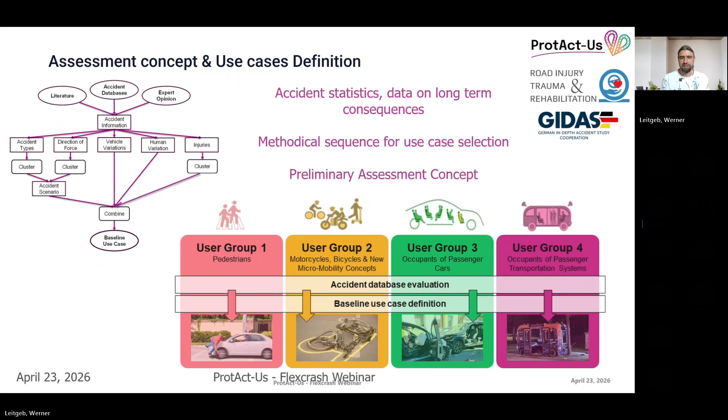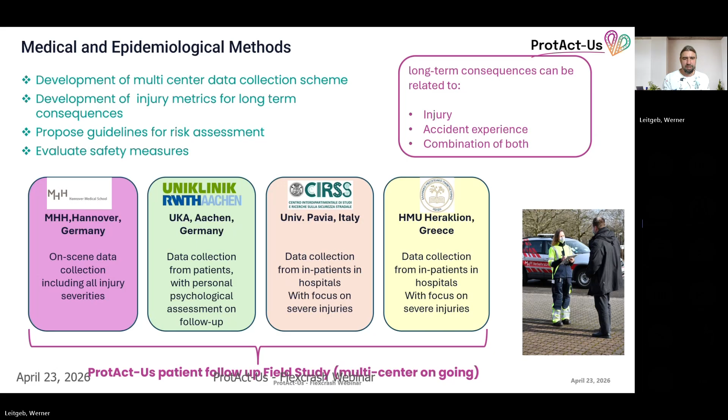This appears in accident statistics more than you think. On the medical side, I'll go over this quickly—we are basing our methods on a patient follow-up study at 4 different sites, across 3 different regions of Europe, getting a good spread of typical accidents from Central, South, and Southeastern Europe. It's very interesting and rewarding work.

On the engineering side—probably the part that interests you a little more—we are developing tools and methods for upgrading our HBMs and physical testing devices, especially for head, neck, and face brain injury, child protection, and tibia fractures, which are very critical if they break in an unsuitable way, hard to fix, and related to long-term consequences.

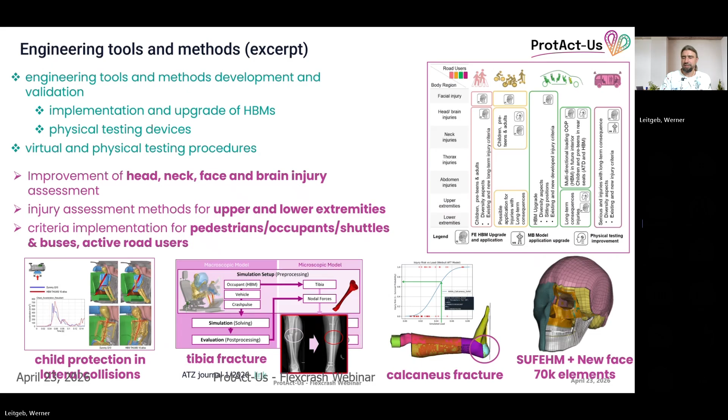Calcaneus fractures—the heel of your foot—are especially critical for scooter riders and pedestrians colliding with vehicles, and the traditional head and face injuries tend to lead to critical long-term consequences, especially on the psychological side. If you're injured on your head and face, you tend to be unhappy.

A quick look at pedestrian impact analysis, using an upper arm case as a study for countermeasures, done by our colleagues at CEESAR, LAB, and CIDAUT, with currently promising results. Go into more detail on the slides if you want, and come back to us with any specific questions.

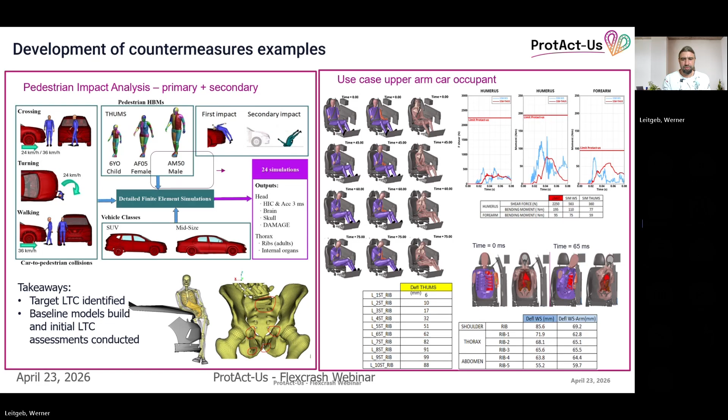Now to plug and promote road safety in general—we have joined and are currently co-moderating our road safety cluster with a lot of projects dealing specifically with occupant road safety and also infrastructure. So we are really combining different aspects of road safety, promoting this work.

On a ProtAct-Us related impact, currently we are providing standardization efforts for data collection and data assessment, especially linking those two sources. But there is still a lot of links missing, and neither hospital nor official road injury data currently collect this sort of data. So this is definitely an ongoing and long-lasting topic.